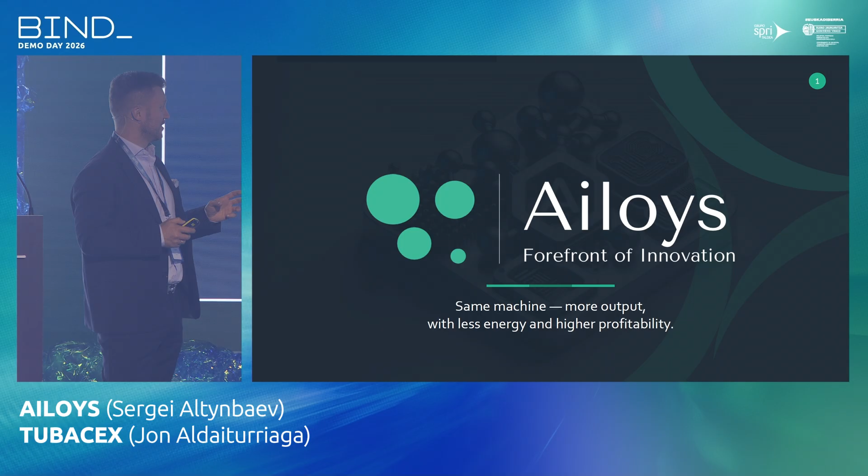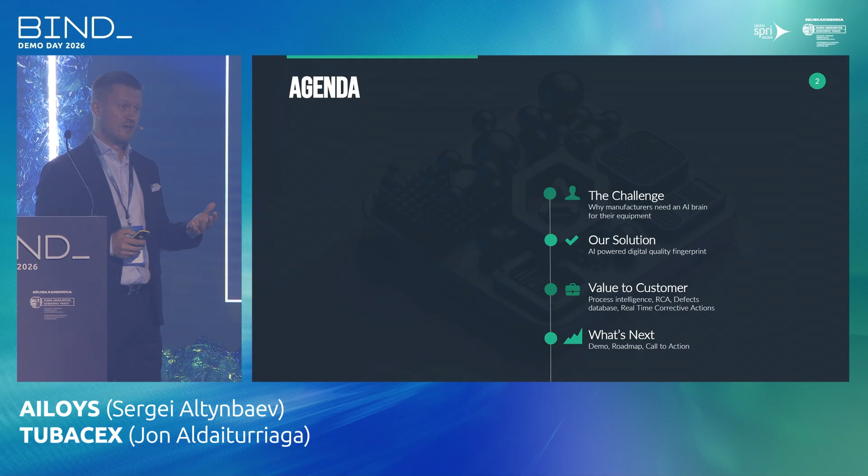Same machine, more output with less energy and higher profitability. Sounds like a dream. My name is Sergei Altynbaev, I'm a material science engineer, and today I'll be talking about three things: the challenge industrial manufacturers have, the solution, and the value to the customer. And of course you'll hear real-time feedback from our partner, Tubacex.

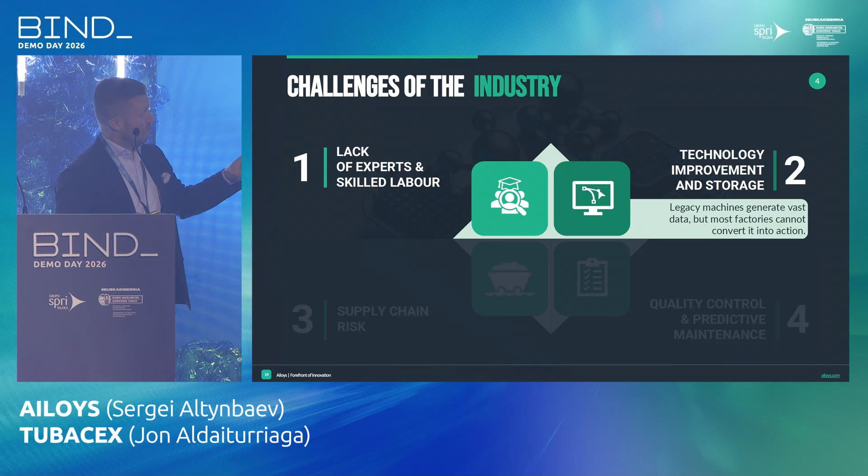So the challenges of the industry: lack of skilled labor, technology improvement, and storage. Legacy machines generate vast amounts of data, but factories cannot convert it into action. Supply chain risk, geopolitical crises, raw material lack of supply, quality control, and predictive maintenance.

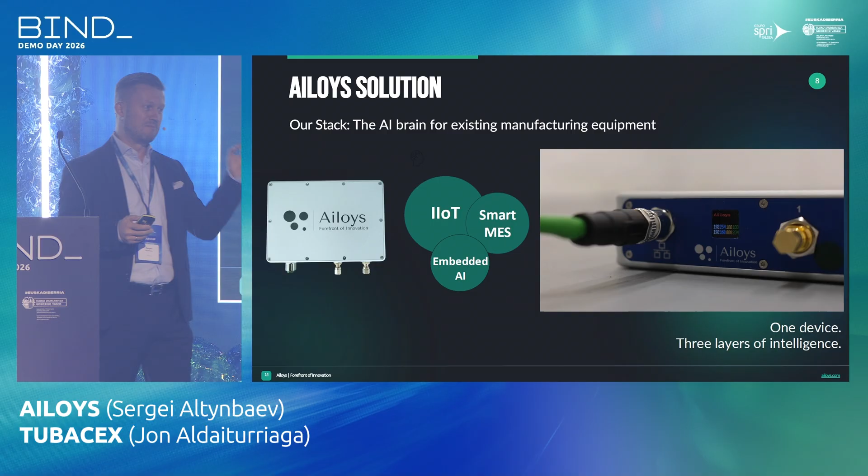Think about the self-tuning guitar. Our acoustic sensors listen to the process and tell the machine how to improve the process. The machine starts learning from the process itself. And it's super easy, plug and play.

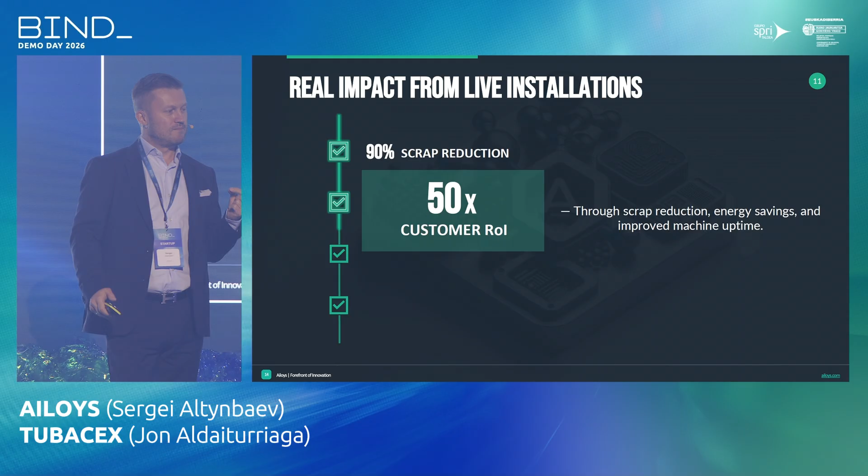We are bringing real impact: 90% scrap reduction, 50x customer ROI, 10% electricity savings, and around 6 tons per machine per year in saved CO2 emissions.

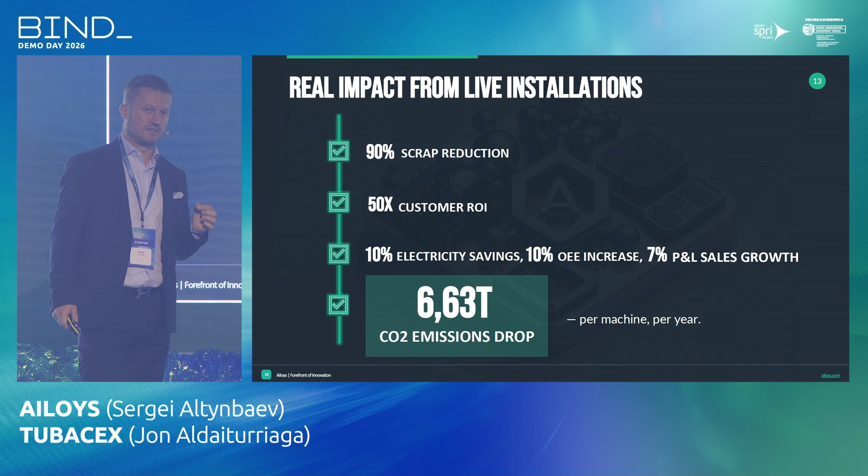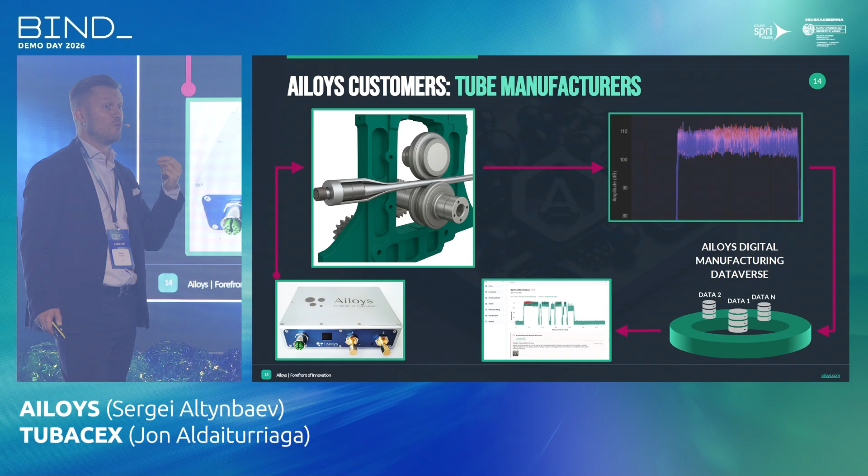So here's how it works. This is the process happening. Our acoustic sensors capture the fingerprint. Like Spotify, which many of you use, or Shazam, the song recognition technology many of you use, our sensors listen to the process and identify which kind of defects you are hearing right now, and what the machine can do in real time to adjust the process.

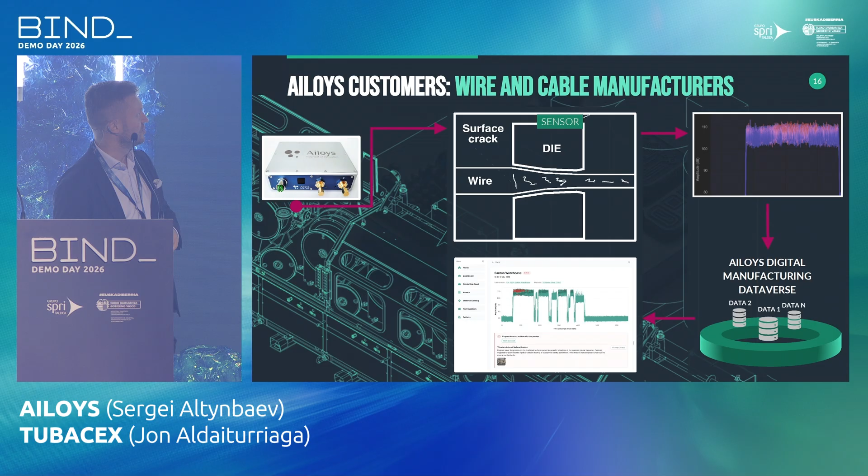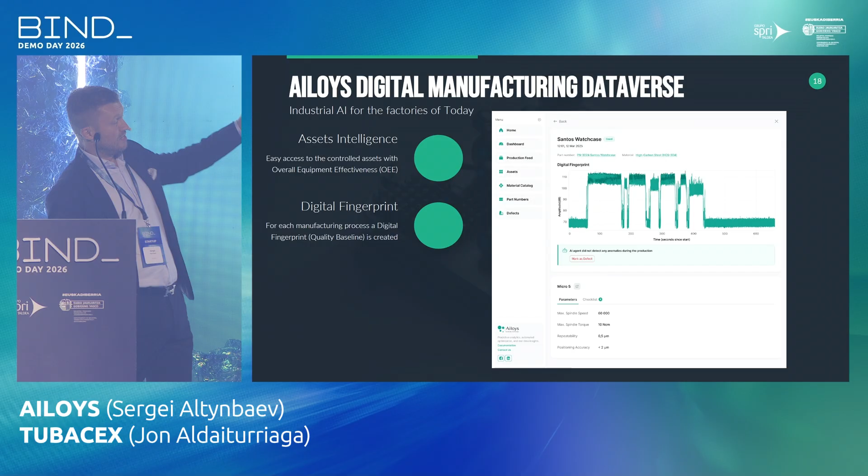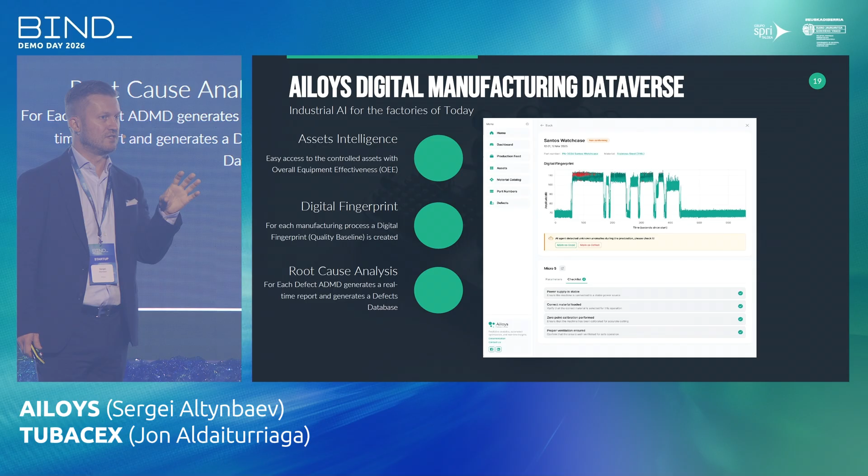We provide our solutions not only in tube manufacturing, but also in CNC machines and wire drawing. We provide an overview of the assets, overall equipment effectiveness, stability of the process, health status of the process, and of course our unique selling point: AI agents, unique intelligence scripts which run on your data 24/7, analyzing this unique acoustic data layer we provide and bringing value by saying what's going wrong and how to fix it. Basically, that's it.

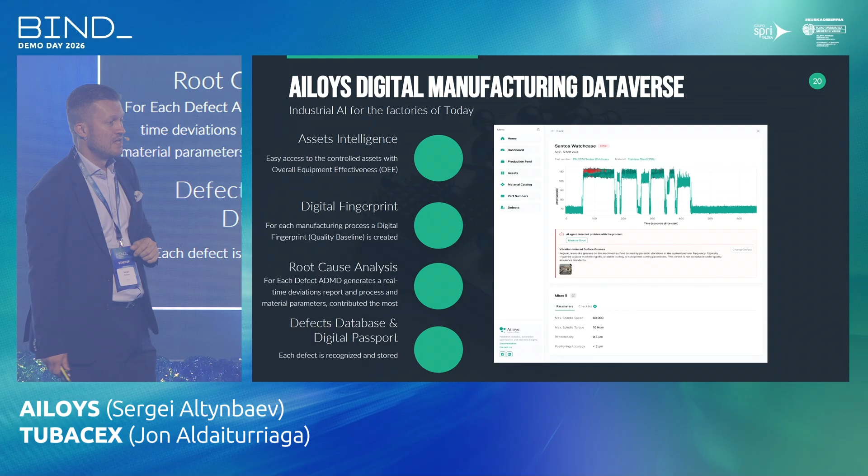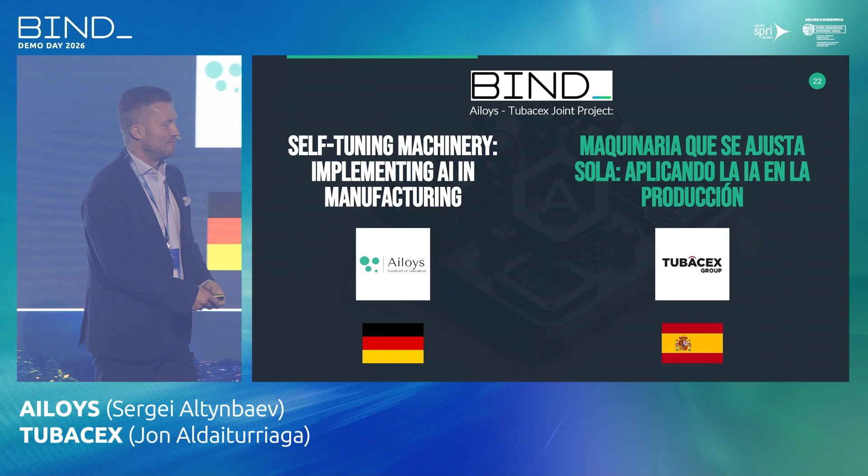Four steps: prove the value, build process intelligence, validate ROI, and scale across production. Now I would like to pass the word to my colleague from Tubacex, Jon.

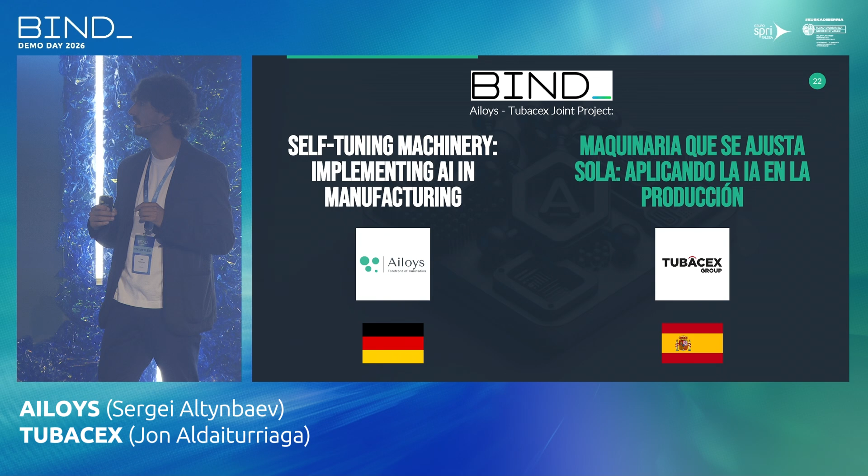So to give you a little bit of context, this collaboration is part of our plan to increase efficiency in our industrial plants. This is the first time that we are introducing AI into our process. We have ultrasonic technology, we have laser technology, but it's the first time that we are connecting with AI technology.

We are already connected in our cold pilgering plant for tube production, and we are already receiving these signals. These signals are being connected with our process and our machine. With this, we expect to improve the self-control of the operator and also the control in the machine, so that if there is any incident, we can stop the machine immediately and prevent quality issues.